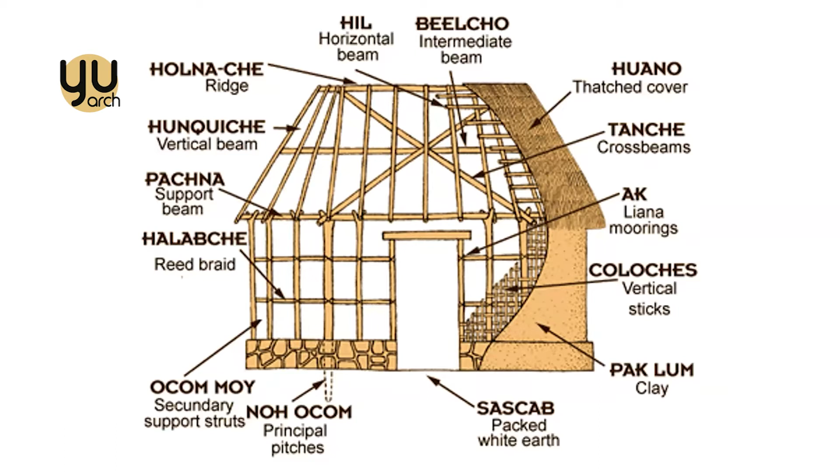So the palapa, in the way it's structured, is a bit similar to that. Obviously with contemporary materials and a contemporary shape, but it's still a main structure with different layers of bamboo woven in different directions and covered with an impermeable layer, a thatch roof, made so that it breathes and lets the air and humidity circulate and evaporate.

The yoga palapa is located on a master plan that we designed. Tulum is exploding development-wise for touristic purposes. As part of this master plan, the assignment was to do 31 lots. Well, a bit more than that, but we convinced them to reduce the lots to 31. And we designed it so that there's a perimeter road, and all the interior connection to the lots is only pedestrian.

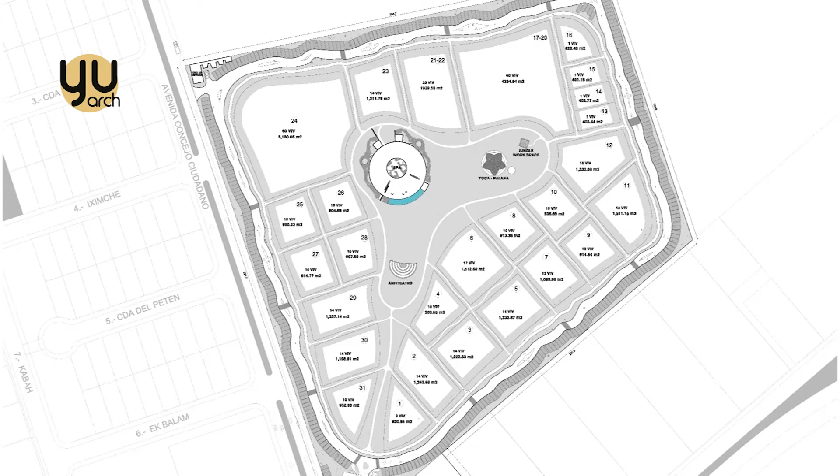In the interior, we maintained the big green area, which is a park, an untouched jungle area, where we would locate the amenities: a spa, a small outdoor amphitheater, and as part of that, the yoga palapa, which is this dot over here.

So the palapa is located in the middle of this green heart, which is untouched. It's natural jungle, which is really uncommon for touristic developments, because they usually cut the trees and then plant grass and make all these really garden-like areas.

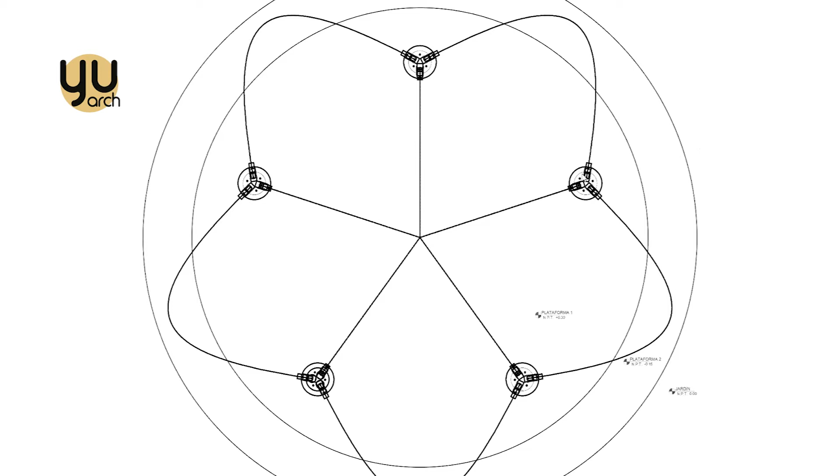And the floor plan is basically a five-pointed star or flower, if you wish, which structurally is based on 5 petals. Each petal is based on 3 curved structural arches, which come down to the ground by a footing, which is the part of steel that receives those bamboo arches, and they connect in the center by a compression ring. So that's basically it.

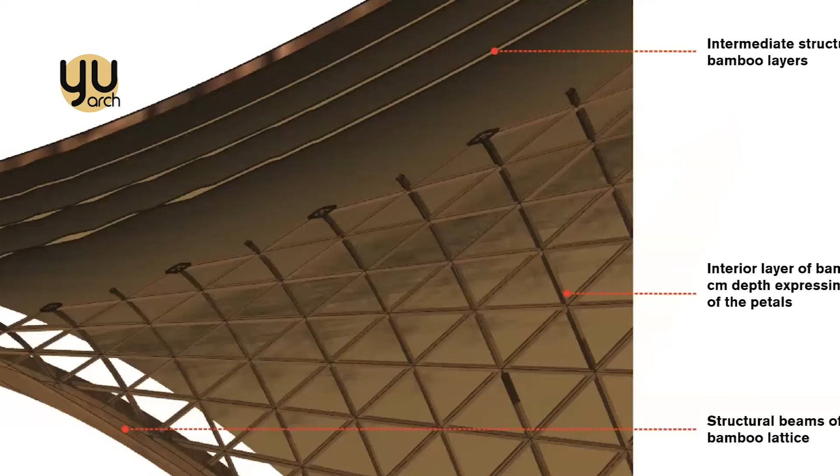So we had an issue here because there's no bamboo in Tulum. The bamboo comes from Chiapas, and the bamboo we had to use was the most structural one. It originally comes from Colombia, but there's a big plantation of it in the south of Mexico, which was for us the turning point of how we decided to use bamboo, because we were actually bringing it from the country and from the neighbor state. However, it's still 8 hours away.

And during that process, we could not bring the bamboo in tube in order to fold and make these extreme arches. We would have to fold it while it's green. And because of the harvesting and transportation time, we would not be able to use it in its pure tubular form. Therefore, there was a decision to slice it in lattice, and then we compress it and attach it together. Basically, if you think of how you curve the wood to make a chair, you slice it in layers, compress it together, and you are able to bend it with heat. That's exactly the same technique we use.

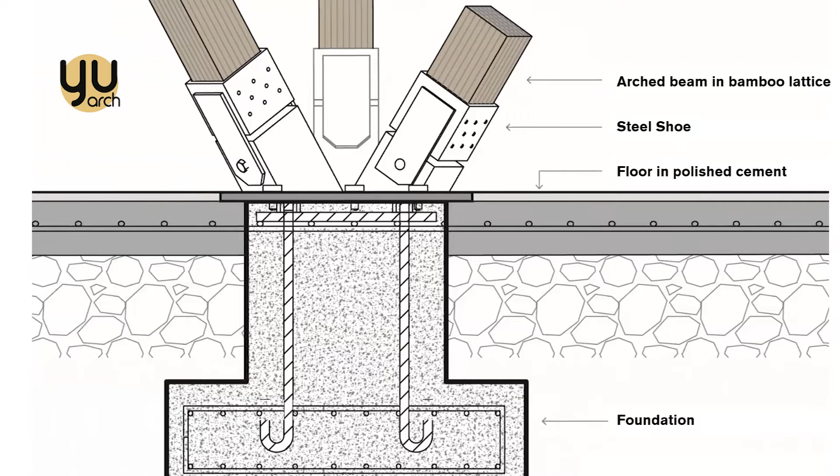These petals are attached to the ground through a kind of steel shoe that receives those columns and connects to an underground footing. And then for us, one of the more complex things in the project was to define the precise angles of these footings, because they're angled in 3 directions, in order to allow the arches to come completely symmetrical and all in the same direction.

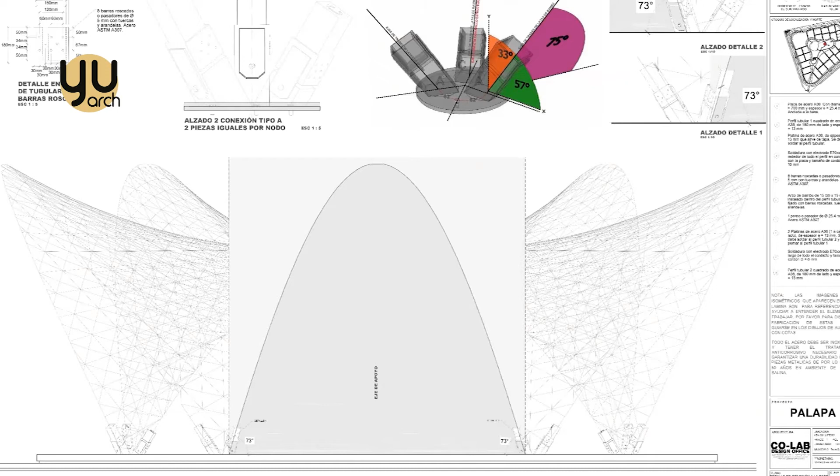This is a quick explanation of the different layers of the footings. That was what we were able to do so that on site both the steelsmen could understand to produce it, but also the people that were going to install it could install it. And this is a detail of the compression ring on top, which works the same way, and they're the only 2 parts of the project that are not bamboo.

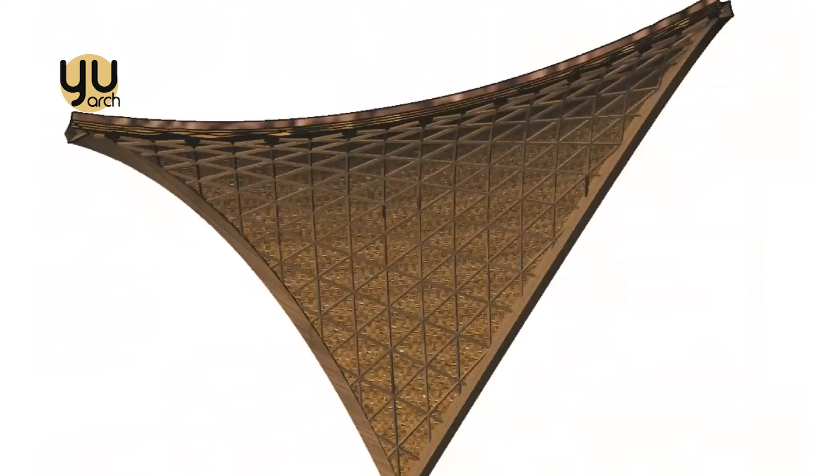So as a zoom out of each petal, we wanted to stress aesthetically the geometry of these petals. And therefore, we came up with a grid that we studied in the office, and we studied different configurations and different sizes until we were happy with it. And then we brought it back to Grasshopper to be able to control the deformation.

There was another challenge we had in this project: we wanted this grid to express the geometry when it tightens and when it expands, but we didn't want it to deform, which is what happens naturally when you build it directly in place. So we used Grasshopper to control this geometry and grasp exactly the connection points between the three different directions of these bamboo slices in different depths, so that we would get that idea of the interior grid.

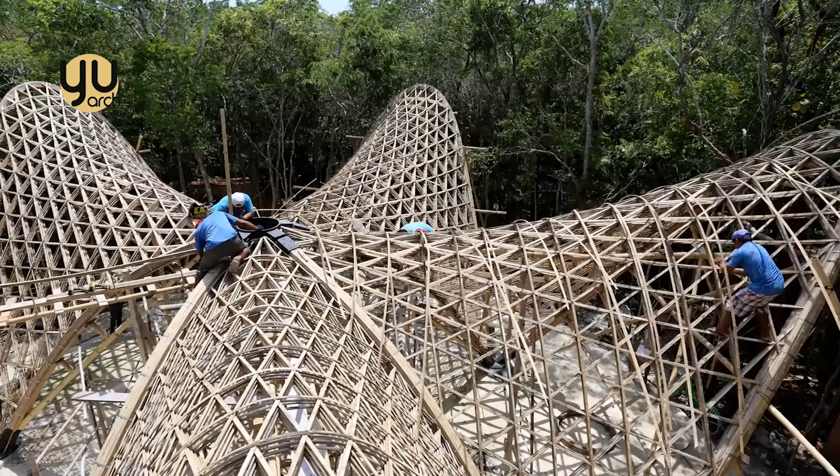You can see the compression ring in steel, the footings in steel, and all the structure beams are bamboo slices that are strapped together. And then we just basically started weaving continuously the 5 petals so that they tie together, also because they cantilever out quite a bit.

The way we did that is that we formed those arches on the floor, and then we lifted them up, and you can see that they are supported by extra structure to hold them in place while we were weaving, connecting them together like a big basket, so that in the end, when you take away the additional structure, they hold in place. It's just like when you build cantilevers in concrete.

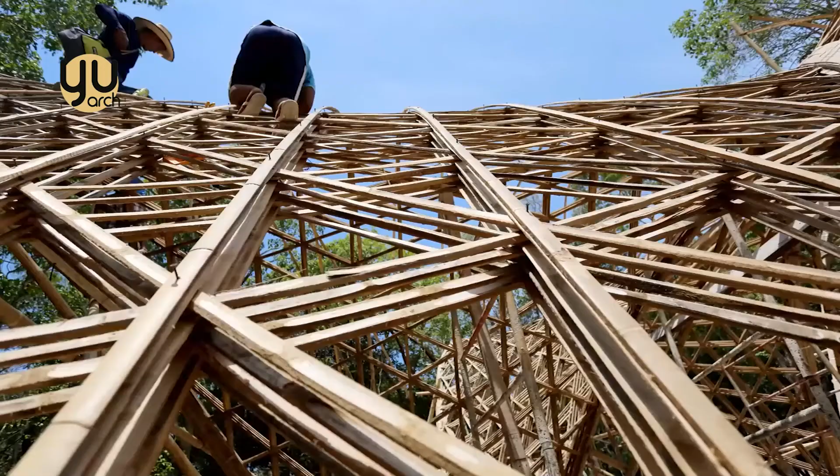That's the different layers of the interior geometry. That's a zoom-in photo of the connection point of the steel shoe receiving the bamboo beams. The structure was done by a structural engineer specialized in bamboo, and we don't really have earthquakes here. We have hurricanes.

So one of the biggest concerns was the shearing winds. It's what we need to worry about here. However, our structures here need to at least be proof for earthquakes of grade 1. We had one very recently, the very first earthquake ever here.

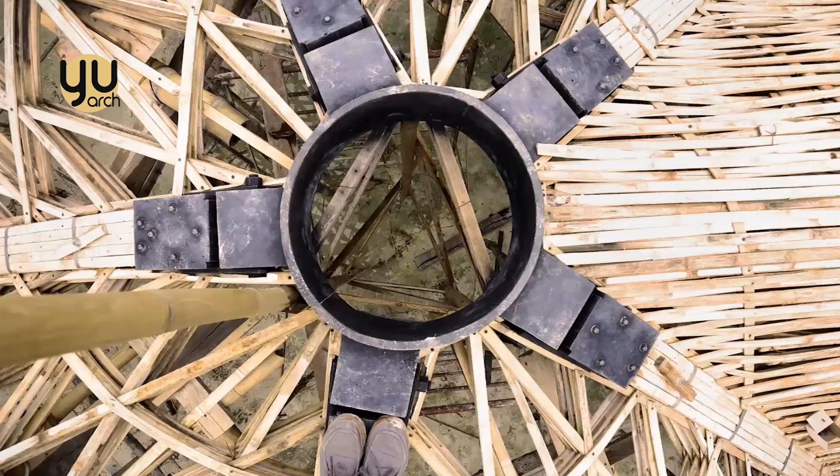So that's why we had 3 structural layers of a very tight weave in different directions. That's what this is. It's exactly like weaving a big basket, and they go in different directions, overlap, so that they tie all those petals together. It's a review of the mesh. And that's the interior result.

So it has a more visible layer that expresses the geometry of the building. And then it has 3 layers behind of a very tight weave that makes the structural connection and strength between them. And then on the outside, it has the zacate for the thatch roof to protect from rain. Some interior photos.

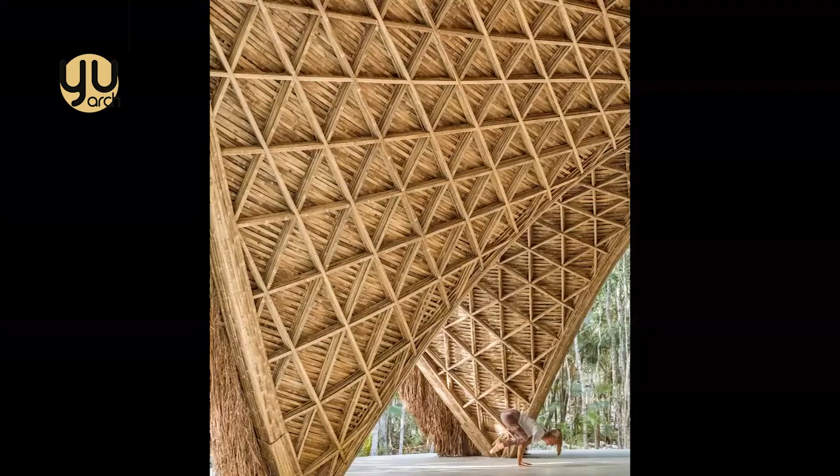This was the very first build project in that development, and we wanted it to have a statement of sustainability for the area, because, as I mentioned, it's being developed quite drastically for tourist purposes, and we also wanted it to be a center point of reunion for people in that development when it's finished.

So it's an open structure. It's common here for developments to have a reunion palapa, as we call it, where friends meet, where you can do yoga, meditation or workout sessions, or have small conferences, small gatherings. It's very common here. That's the compression ring that ties on top all these cantilevered structures.

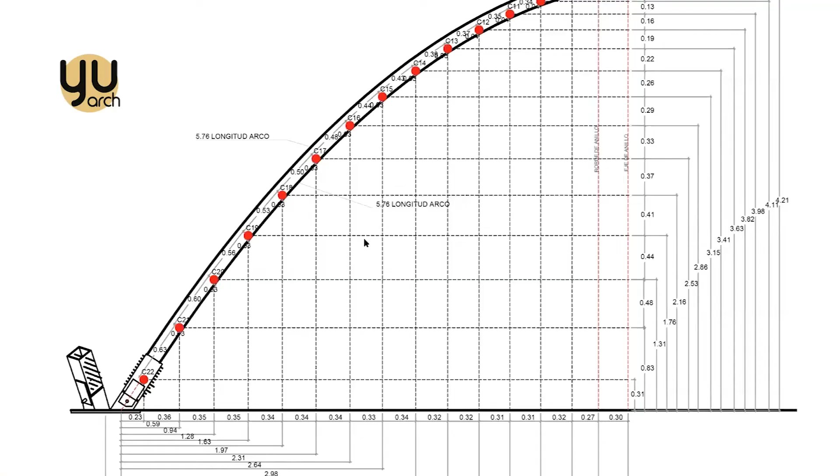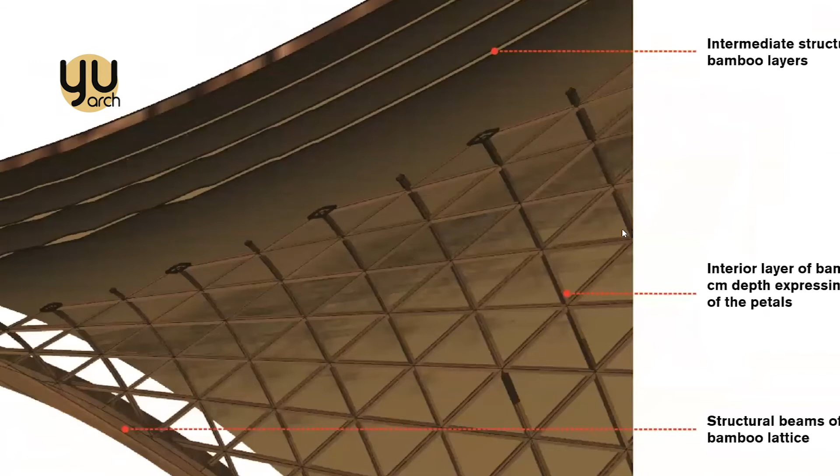In the end, it comes back to the plan. It's this. That's what you build first. These lines are those structural columns. And then you start filling them in the middle to come back to this.

Judging from the plan, did you add the ring later, after putting every cantilever together? Sorry? I'm just judging from the plan. Did you add the middle ring that you showed? Yes, when they were all up, we put the compression ring.